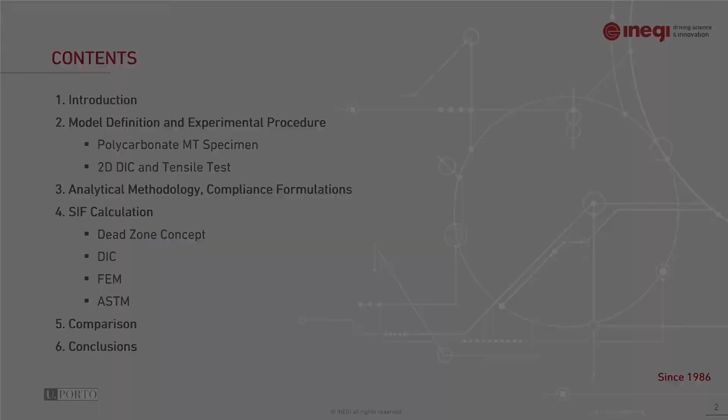The first section is devoted to the introduction. The work that we have already conducted is related to a new analytical solution for the SIF calculation. In order to prove the concept, it was needed to make some experimental and numerical tests.

A middle tension specimen with a central notch, made of polycarbonate optical grade, was submitted to a pure tensile condition in uniaxial loading, and 2D digital image correlation was used to evaluate the experimental data and monitor the deformation field in order to calculate the stress intensity factor.

Based on the ASTM standard, the specimen was prepared and the SIF was calculated as a reference solution, and the compliance method was employed to acquire another stress intensity factor based on the dead zone concept, which is the main goal of this work.

Computationally, the problem was resolved using the finite element method, and the obtained results were used to make a comparison between all the results, and the dead zone characteristic has also been surveyed.

For the model definition, the middle tension polycarbonate specimen was prepared based on the ASTM standard, and afterwards it was pre-cracked by 1 millimeter on the notch on both sides. The geometrical properties: W is 30 millimeters, the thickness is 3 millimeters, the radius of the hole is 1 millimeter, the initial notch AN is 6 millimeters, and the crack length is 7 millimeters.

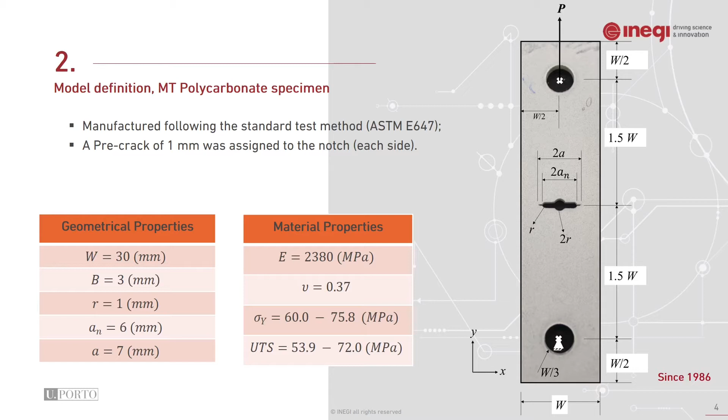The material properties have been taken from the literature: Young's modulus, Poisson ratio, yield stress, and also ultimate tensile strength.

As can be seen in the figure, the experimental test was done using an Instron machine with a capacity of 1 kilonewton. Two halogen lamps were positioned in front of the specimen, a camera was positioned in front of the specimen, and the gripping system is shown on the right side.

The maximum capacity of the machine was used, so the applied load was considered as 1 kilonewton with a frequency of 10 hertz.

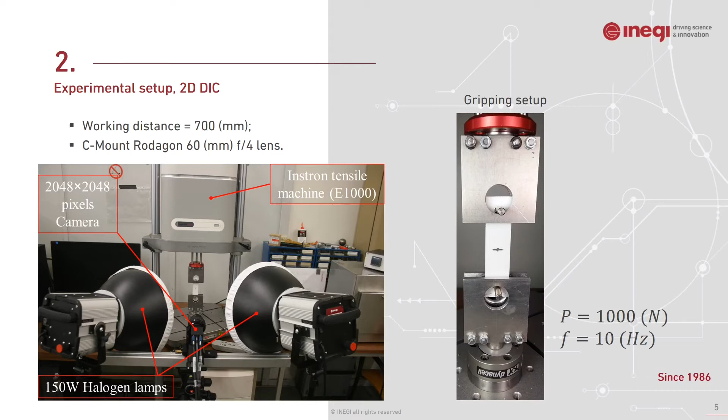In this slide, I'm going to give some description of the analytical methodology based on the stress dead zone concept. On the right side, you can see an image showing the plate with the central notch, which is pre-cracked.

The region highlighted in red is the dead zone, meaning this is the minimum deformation variation during the tensile test or fatigue crack growth test, which can be negligible for the fracture calculation.

The literature by Anderson, as you can see on the bottom side, reported that this triangular region possesses approximately a height equal to beta times the crack length, where A represents the crack length and beta is 1.2.

The equation is presented here. Just a quarter of the model is considered. In this case, P prime is the applied load divided by 2, the small w is the total width divided by 2, and A and the uncracked ligament is W minus A.

It is possible to obtain the displacement field and afterwards the strain and stress field on the uncracked ligament. Finally, it is possible to obtain the vertical displacement by integration: Vxy equals P over 2EB integrated from 0 to beta A of dy over W minus A plus Y over beta. This is the vertical displacement.

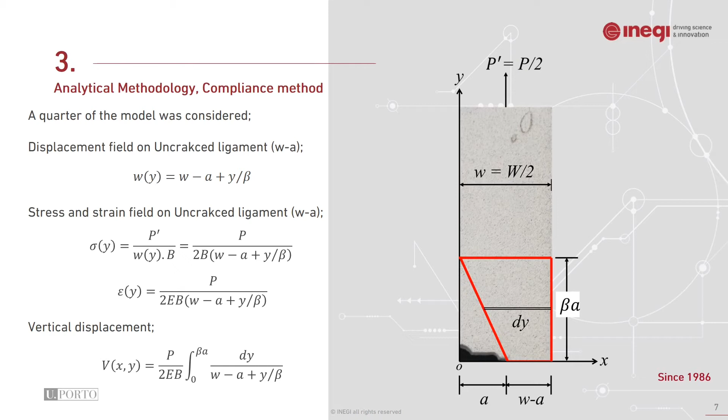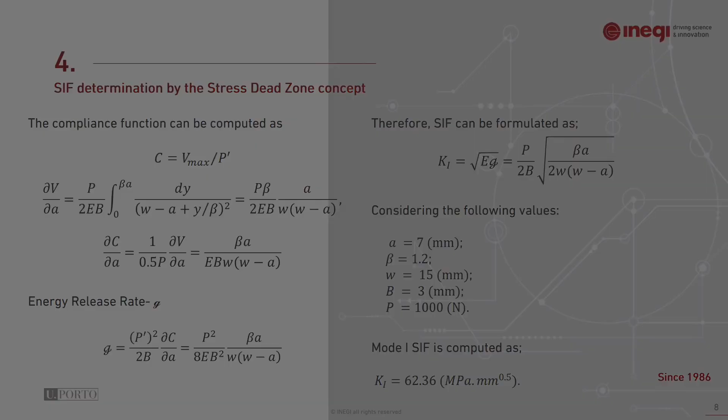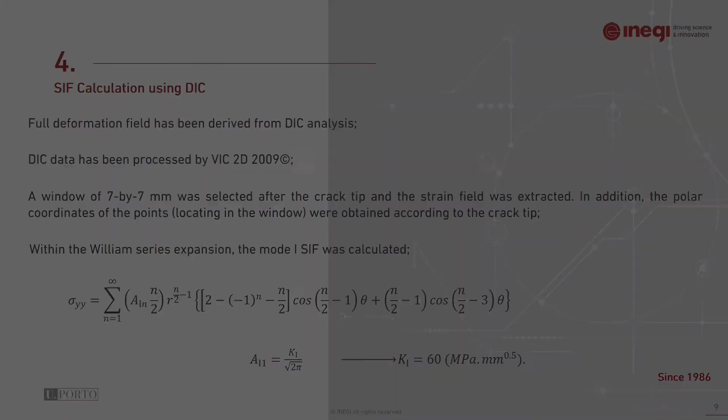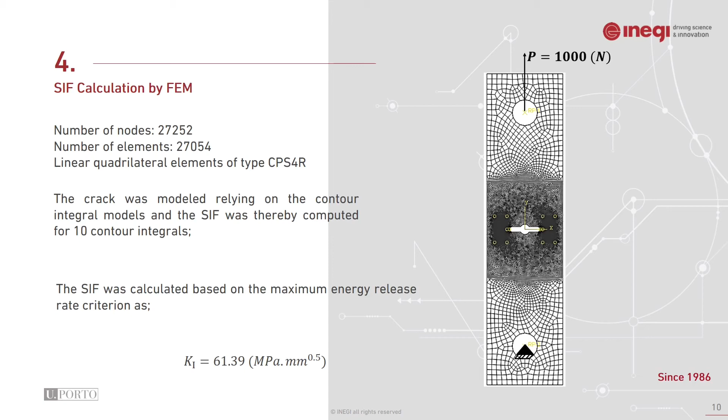The crack was modeled relying on the contour integral models, and the SIF was calculated for 10 contour integrals based on the maximum energy release rate criterion. The mode 1 SIF was calculated as 61.39.

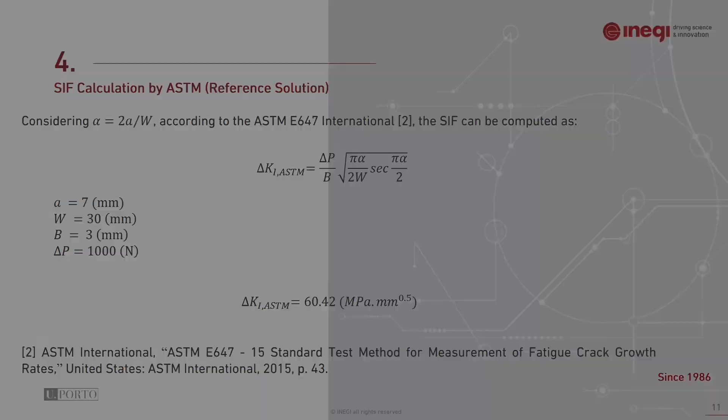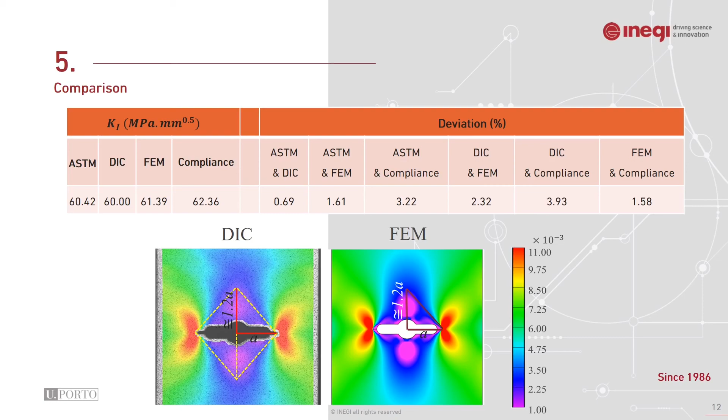The conclusion of this work can be stated as follows: the characteristic of the stress dead zone, and also the compliance function application on the stress intensity factor calculation, in order to prove the concept of the stress dead zone.

A middle tension specimen made of polycarbonate was tested, and digital image correlation was used in order to analyze the experimental data. The model was also solved using finite element method formulation in order to obtain a comparable solution on the stress intensity factor and also deformation.

The encouraging results prove that the proposed analytical formulation, based on the compliance method, has been correctly implemented, and the stress intensity factor and dead zone characteristic were verified. The results obtained from digital image correlation and finite element method put into evidence that the supporting methodology is efficient and reliable to elastostatically study the pre-cracked plate, in this case used for polycarbonates.